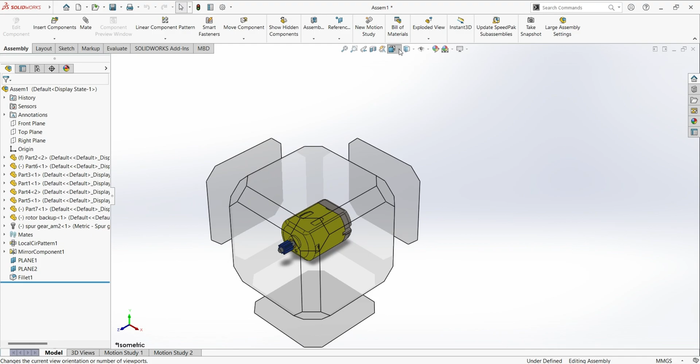So this is my DC motor project, and this is the assembly view. I have it here in its isometric view, so I'm showing you all the views. This is the front view, this is the top or plan view, this will be the right view. The right view is identical to the left view, and then we'll go to the back view, and then this is the bottom view.

So we're going back to isometric view, and when I do this, we can see the hidden lines, the components that make up this DC motor more clearly. So we can see the inner components more clearly, and this will be my assembled DC motor. We'll move on to the parts right now.

Okay guys, so this is my first part. The first part is called the housing. This is the housing of the DC motor.

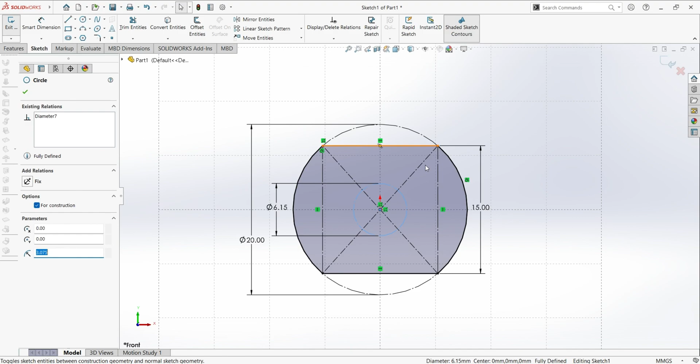So how I made this is, once we edit the sketch, this shows the base of the sketch on how I made this. First I made a circle with 20 millimeters diameter, and then another circle with 6.15 millimeter diameter. This circle and this circle are construction geometry. Once I put this construction geometry, it basically makes the lines as a baseline for sketching your lines on top of it.

After these circles, I chose this center rectangle. I took it from the middle axis and pulled it. The length of this rectangle is 15 millimeters, and I made this construction geometry too.

Why I did this is because after this I chose the line tool. I basically did one point here and one point here to make one straight line, and did the same on the other side. After this I chose the 3-point arc option, from here to here, and fixed this inside this circle's arc, and did the same here, so we get this shape.

After that I simply boss extruded. Once I boss extrude, I get this. Once I edit the feature, you can see this is the plane, and it's 19 millimeters from mid plane. Because I chose this as the mid plane, it will go from both sides, both axes.

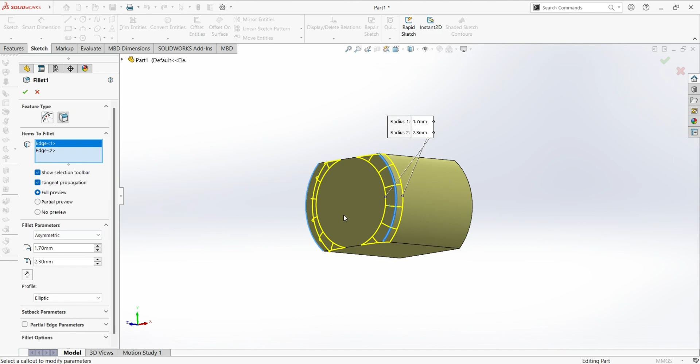Then we'll move on to the next step. I chose the fillet option to make these rounded edges of the housing, and then there's another fillet to the top and also the bottom of this. For fillet one, I've chosen 1.7 millimeters and 2.3 millimeters as my fillet parameters. For fillet 2, it's 1.25 because this is a symmetric fillet.

Then boss extrude. For this boss extrude, I made a circle right in the middle, and then I extrude it for 1.75 millimeters, and then I fillet this edge for 1 millimeter.

Moving on to the next step, I shelled this part over here, because this is a housing, it has to accommodate other inner components. For the shell, I have chosen this face and this face, and the parameters are 0.375, which is the thickness.

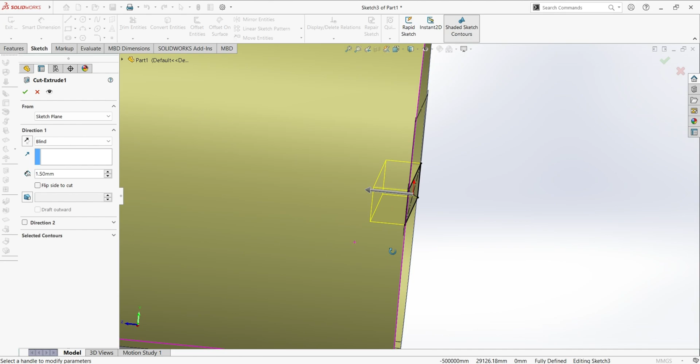After doing that, I moved to cut extrude. This cut extrude is here and also here. So how I did this is I chose the rectangular option from the middle and pulled it up with 1.5 millimeter length. Then I went to surface revolve.

This part and here, and then I move to thicken. So then I went to surface revolve, which you can see here. I did a sketch, and in this sketch I made this curved line, this arc, and then this straight line. This arc has a radius of 0.75 millimeters, and then 1.25 millimeter in length for the straight line.

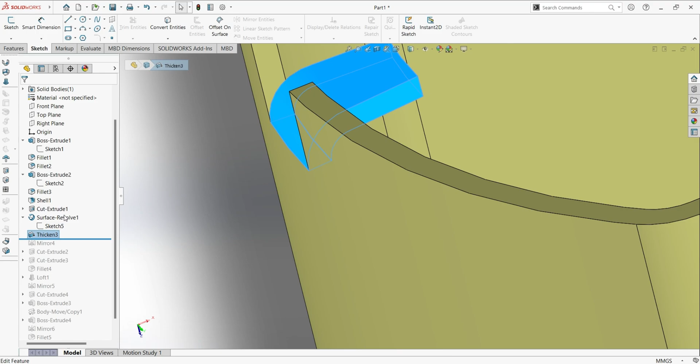So then I surface revolved this. After doing that, I thickened the line. What happens basically is that this line over here, I am making this particular line thicken a few millimeters, which is 0.38. And then I am mirroring it, so this part over here has the same feature.

So I mirror it about the right plane, so this feature can be mirrored to the other side easily.

Next, I'm going for cut extrude, cut extrude over here above this hole. It has a 1.5 millimeter diameter, and I fixed its position up from this hole, from this axis, at 5 millimeters. After doing that, I go to another cut extrude on the sides, these holes over here and here.

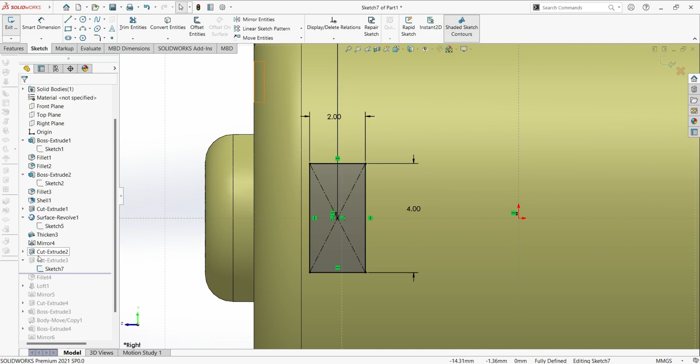So if you can see, this rectangular over here is straight in line with the axis. So this is a center rectangle, 2 by 4 millimeters, and then basically just cut extrude through all.

After doing that, I fillet this part over here. The fillet is 0.5 millimeter.

Moving on, we have the loft. For this loft, I had two sketches. So to have a proper look, we'll go to this. I made this sketch over here with these straight lines, and I made this point and this point as an arc.

After making this arc, I can bend it to my will using these little connectors. There are 2.25 and 2.25 arc radii, and this one has a 4 millimeter distance.

I repeated the same arc with a distance over here, just right in front of it. This distance is 0.38.

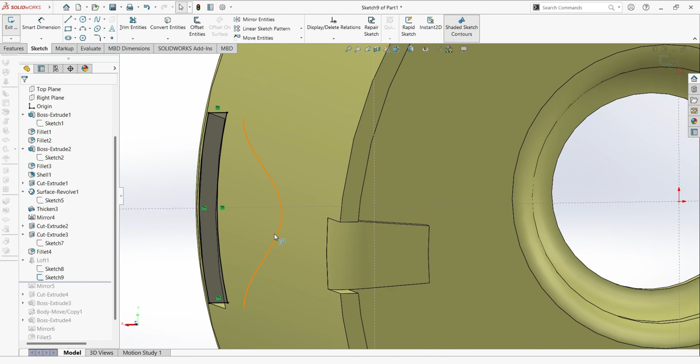So we will go back to normal view, and then there's this other sketch, over here, with these 4 lines. I made these 4 lines for the lofted area.

For this area to loft, I had to convert the entities, and only then can I loft this segment to get that perfect curvature.

So when I loft it, this is how it becomes. The area chosen is sketch 9, and this is sketch 8. So when I loft it, I loft this face to this face, and the metallic parts will bend from here to here, with this part excluded.

So then I mirror this feature to here. It is mirrored on the right plane.

Moving on, we have the cut extrude. This cut extrude is at the bottom of this housing.

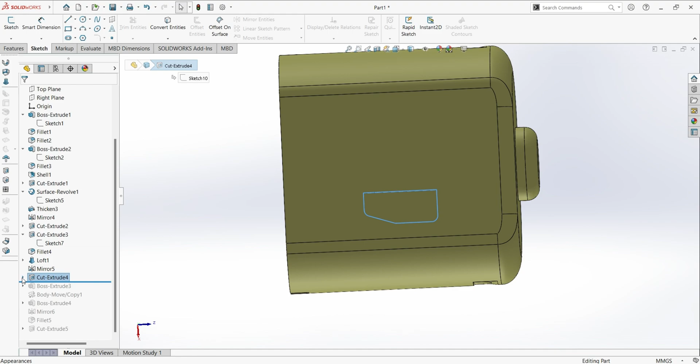We'll have a look at the sketch. So there's a straight line, straight line, straight line, another curve, straight line, a slight curve over here, and then another curve over here. You can see the distances are all made up.

First of all, how I did this: I made a center rectangle, pulled it up, with a distance of 2.66 by 6 millimeters.

After that, I had to make a construction geometry. After making the construction geometry, I built the lines as straight line 1, straight line 2, curve, straight line 3, and then there's a slight curve over here, and before this I had to make another center rectangle.

If you can see this line over here, this part and this part join. So from this corner to this corner, there's a straight line, then a curve, and then another straight line back. After doing that, I cut extrude it up to next.

I chose up to next because it will have to bend a bit inside.

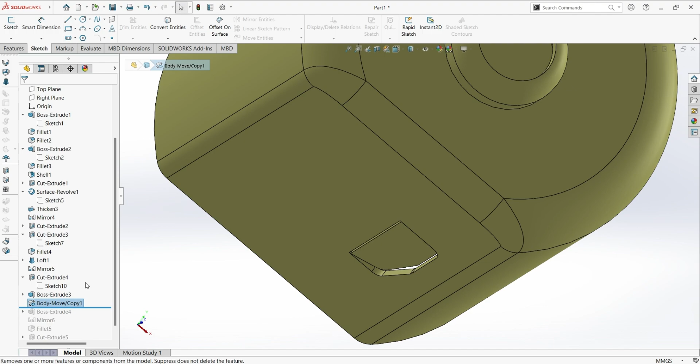So what happens here is this particular edge over here goes inside negative 13 degrees, like this is how it looks inside, negative 13 degrees.

And then boss extrude over here. For this boss extrude, I just have to fill the gap between this plane and the angled part over here, so there will be a gap here. To fill in this gap, I have to boss extrude.

So I go to edit sketch. As you can see, there's this line. We convert the entities and then simply enter boss extrude, so it will fill from here up to here.

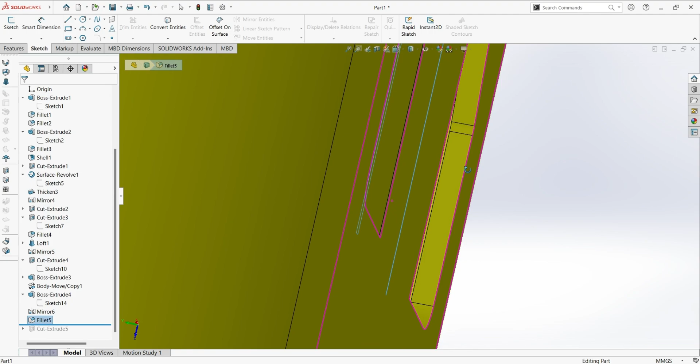After doing that, I mirror this feature over here, again using the right plane, and then I use the fillet feature over here and also over here to smoothen those two parts. And then as final feature, we cut extrude over here, for this purpose is for the cover of the DC motor to join this housing later.

So for this cut extrude, we go to the sketch. It's another center rectangle with 1 by 2.5 millimeters. So this is a simple feature, and then that's it. This is the first part of our DC motor, and it's called the housing.

Okay, so this is our second part. This is the cover for our DC motor. This is how it looks. So we start this by going up over here and we look at the sketch.

Okay, so here we start off by making this circle, and then we choose it as our construction geometry, and then we make this rectangle just how we did in the first part. We choose everything as our construction geometry first, with 15 millimeters in length and 20 millimeters in diameter for the circle.

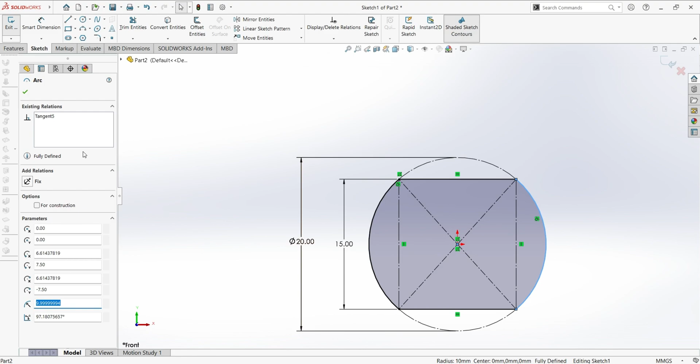So after doing that, we build our lines on top of the construction geometry. There's straight line 1, straight line 2, and then closed by this arc over here and also over here. So you guys can see. Next, moving on,

we boss extrude our sketch 5 millimeters. Alright, after that, we make a circle just at the center with 8 millimeters in diameter, and then we will boss extrude this circle just for 2 millimeters in distance, and then we will go for fillet 1.

Fillet 1 is exactly like how we did for part 1. Okay, so we look at the feature again. There's 1.7 by 2.3, and this is asymmetric. It means they are not the same on both sides. Okay, and then after that we go to fillet 2, top and the bottom.

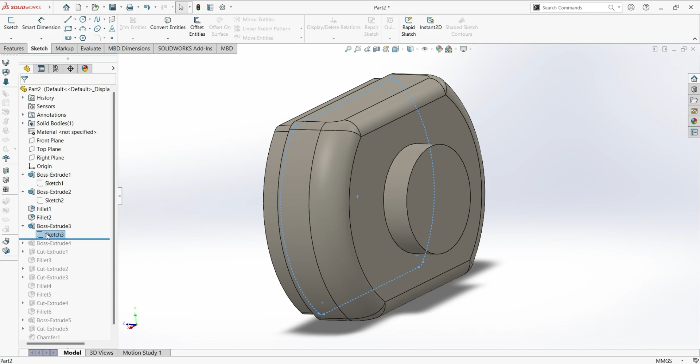So these are the dimensions, 1.25 millimeters, and then there's boss extrude. So for this boss extrude, we are making another sketch. Okay, this sketch over here, you can see there's a point over here, so that's basically an arc.

Over here too, there's an arc over here, over here, and over here, and over here. So with only two straight lines here and here, we make this arc, 0.87, 0.87, and goes the same for both up here, and then 9.67. Basically it has a distance, these arcs.

The parameters are 0.25, and after doing that, we boss extrude the feature. So this feature then comes in front 1.5 millimeter in distance. Okay, so we will be doing the same thing with the parameters of 0.25 this time, and then we boss extrude the feature 1.5 millimeter.

Okay, so then we cut extrude. For cut extrude, we have to look at the sketch. So this is a sketch. So look at the sketch. What I did is basically this straight line over here, and then there are two arcs.

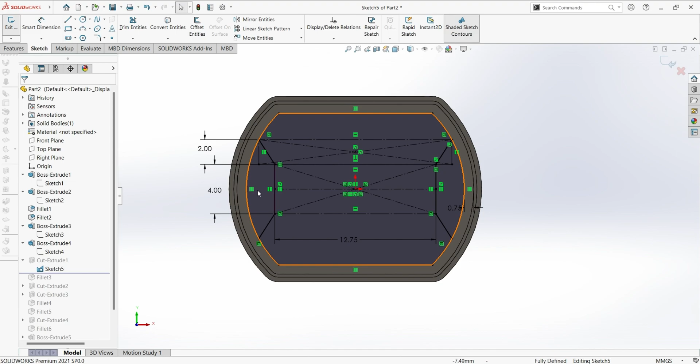So after doing this, we convert the entities, and then we'll make two straight lines over here, and then connecting this arc and this point over here with straight lines, and we'll repeat the same thing at the bottom, and that's how we get our sketch. After getting the sketch, we will cut extrude for 6.5 millimeter in distance. It will go up to this area.

After doing the cut extrude, we are going to fillet. This is just an additional feature. We choose all these edges, there are 12 edges over here, 6 here and 6 here. There are symmetry edges with 1 millimeter degree, and then after doing that, we go to the cut extrude at

the sides of the covers. So for this cut extrude, we're going to look at the sketches. Basically, there's a center rectangle over here made with the construction geometry, and after doing this, the dimensions are 2 by 3 millimeters, and then joining this construction geometry is these straight lines with this arc over here with 1.5 degree radius.

And then what happens is I cut extrude both parts, and then I cut extrude the middle. So the middle, its point is its axis with 2.10 millimeters in diameter.

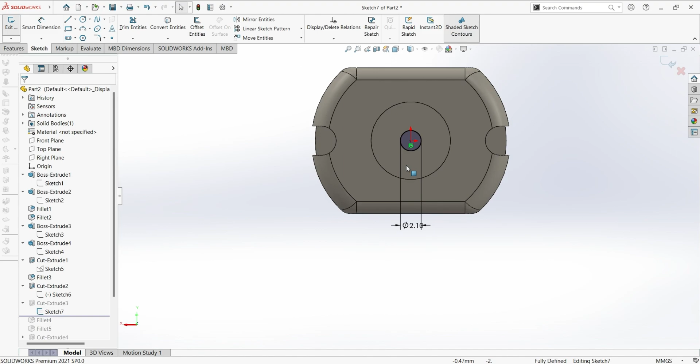After that, we're going to fillet the boss extruded part over here for 0.25 millimeters, and then we're going to fillet the parts we cut extruded at the sides for 0.10 millimeters.

After doing that, we're going to cut extrude here beside the circle. We'll look at the sketch - this is a center rectangle, dimensions 2.8 and 0.4 millimeters, so they are symmetry. Then we will exit the sketch, cut extrude, and it's cut through all, so it doesn't have a dimension.

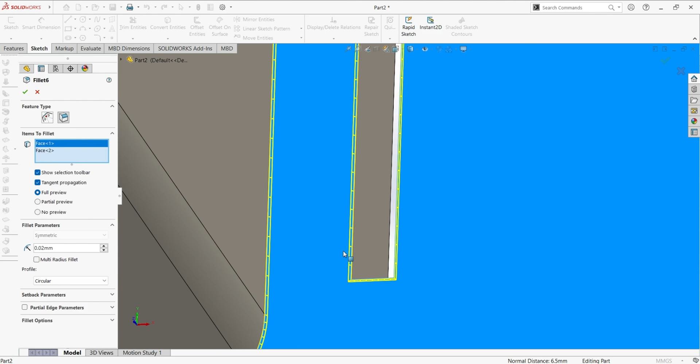And then we will fillet the back of the cover. Just to look at this, yeah, so it's in front, here and also here.

Okay, and then go to the boss extrude. Looking at this sketch over here I made, there is two straight lines and then one arc, and this arc I've made with the straight slot, this option over here.

After doing the straight slot, we boss extrude this feature for 4 millimeters. So this is how it will look.

And then we go to the cut extrude of this part. Look at the sketch - there is a circle above this circle, a bigger one with 6 millimeters. Then we edit the feature. We look that this circle cuts up to here, but it's not cutting the whole part, yeah, it has a distance of 2.5 millimeters.

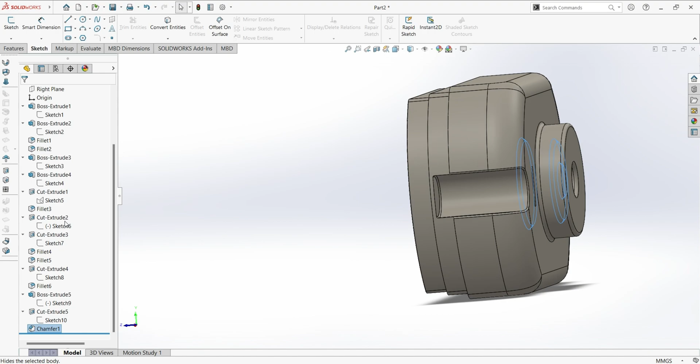And then we chamfer these areas, this part over here, for 45 degrees and 0.25 distance. So this is our second part, the cover of the DC motor.

Okay, so this will be the third part of the DC motor. So we choose the front plane first, so normal to - this is how we will make our sketch.

Okay, so if you look at this sketch over here, first of all there is a straight line, and then the straight line is made a construction geometry. So basically how I did this was using the straight slot feature. After doing that, I have to change it to construction geometry.

Once I've done that, I'll do a straight line and then an arc with 0.7, 3 point - you can see the dimensions at the side - and then there's another straight line, and then there's another bigger arc over here. This bigger arc has a radius of 1 millimeter, and then there's a straight line ending this part, which is 5.5 millimeter. After that, we have the base bend.

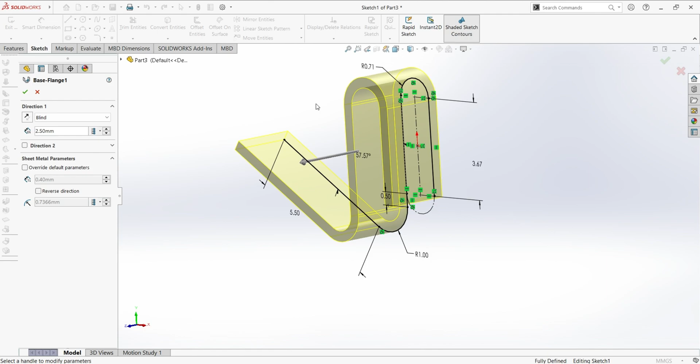We look at the base flange feature. The base flange feature, basically it's like a thicken or boss extrude feature for these curves and everything. So it is brought up for 2.5 millimeter in distance, and after doing that, there's a base bend and also base bend 2. So these are the parts of the base flange.

Okay, after that there is boss extrude here. Why we boss extrude here is we look at this sketch. The first straight line, we make a rectangular over here and then change it to construction geometry, or convert entities, sorry - we convert the entities, and then what we do is we boss extrude it for 4.5 millimeter in thickness.

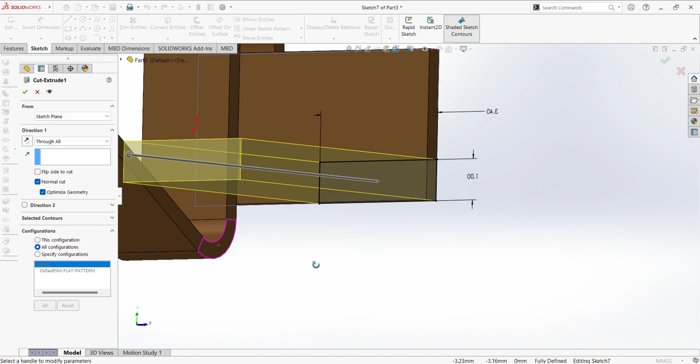After doing that, we go to the cut extrude. We cut extrude a small portion of the extra boss extrude, so there is a corner rectangle over here. We convert these entities, and then you can see that the dimension of this particular rectangle is 1 millimeter. After sketching that, we will cut extrude through all. So have a look.

After doing that, we will go to the fillet. At this fillet, we are curving this part, this edge over here, giving it a curvature. How I did this is I chose 3 parts: part 1, part 2, and also part 3 - these 3 sides, these 3 faces, to make this fillet.

Okay guys, so this is our last part. This part is called the rotor, and unlike the previous parts we've done before, this is a single part. It is not assembled. As you guys can see, there are multiple parts, it looks like it has multiple parts. Yes, it does, but then it is all made within one single part. Okay guys, so looking at how we did this, we'll move up.

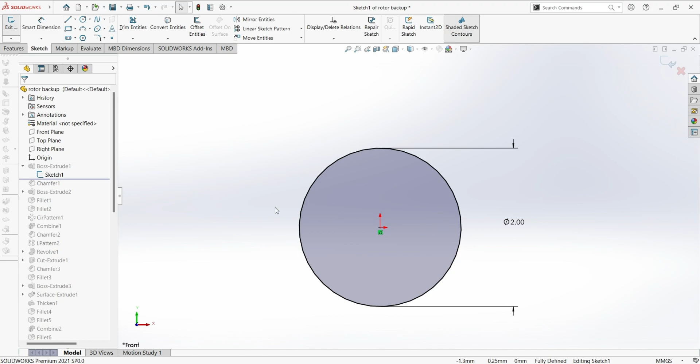Okay, so at the front plane, we're going to do our first sketch, which is again a simple circle with 2 millimeters in diameter. After this, we're going to exit sketch and then boss extrude this with the mid-plane feature, and the distance will be 38 millimeters.

After this, we will move to our chamfer. We're going to chamfer this area over here, and then another edge over here, both edges for 45 degrees, and the distance will be 0.2 millimeters. After doing that, you can have a look here, these are the chamfered edges.

So we're going to another sketch. Okay guys, so when we edit the sketch, we can have a look at the sketch of this part here. This part is called the core disc.

So what happens is that I'm going to make a circle just above this shaft, and then after this shaft there's another circle. So one circle and then another circle over here. After that, we're going to make this circle as a construction geometry, same with this one over here. After changing this to construction geometry, we're going to smart dimension it for a 2 millimeter distance.

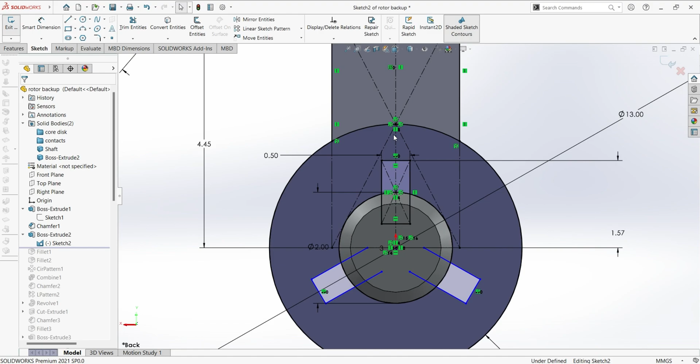After doing that, I'm going back here over the shaft and making a center rectangle. And then after making this rectangle over here, I'm going to make another rectangle starting from this point to here, and you can have a look at the dimensions, 4.45 by 2.25.

And then this one will have 0.5 millimeter, and then from this edge to the axis we'll have 1.57 millimeters over here.

So what happens next is that we're going to make this distance from the axis to this one, 4.45, as I've said before, and then we're going to insert a line.

So what line we're going to insert is this particular arc over here, this one, this arc. So we're going to go for this option, the 3-point arc. The first point will be here, second point will be here, and the third point will be the middle.

Okay guys, so after choosing the arc, we're going to make a line, a simple line here, and then we're going to move for another line over here.

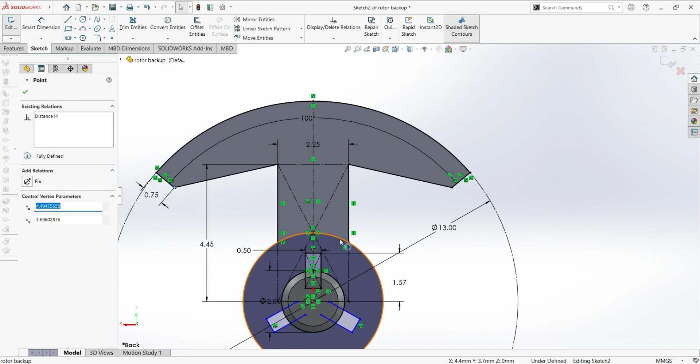After making these lines, what we're going to do is join these lines, this one over here and here. We're going to make a point with distance, and then after doing that, we're going to apply smart dimension for the lines, 0.75, and it should be the same with this line.

After that, we're going to apply smart dimension for the arc, which is 100 degrees. After applying 100 degrees, we're going to move on to this line over here.

So what we're going to do is apply a straight line from this point to this point, you can see, and then there's this point to this point. After applying this straight line, we're going to make another straight line from this point to this point. Same goes for this point and this point, making this whole core disc.

So after that, we can have a sketch like this. Okay, have a look.

What happens next is we're going to boss extrude our core disc, and we're going to boss extrude for 3.8 millimeters with offset, not sketch plane. We're going to choose the offset option, and then 3.8 millimeters, and this distance will be 0.5 millimeter depth.

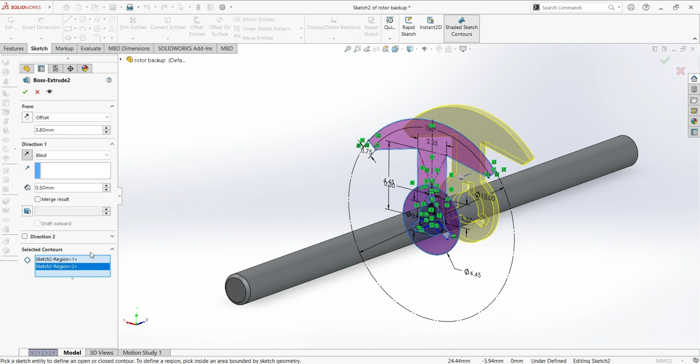Okay, so the selected contours are these: sketch region 1 and sketch region 2, this one up here and the circular one. After doing that, we're going to move on to the fillet. So we're going to apply the fillet feature over here, this edge, and also this edge over here.

Okay guys, so the edges chosen are already here: there are 1, 2, 3, 4, 5 and 6. Just like before guys, it's 1, 2, 3, and then there's 1 and 2. So both edges are chosen, and once we've done that, the fillet is going to apply.

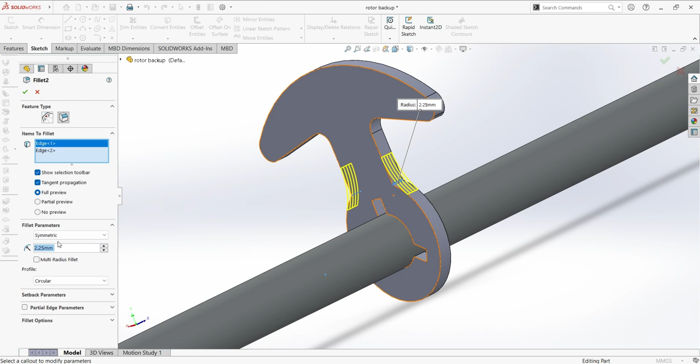Okay guys, so moving to the second fillet, which will be for this part over here. Look at the difference: this is a straight point and there's a corner over here. To avoid that, I'm going to apply a second fillet. For this fillet, we're going to apply 2.25 millimeter in radius, and after doing that, we're going to choose the circular pattern. So if you go here, linear sketch patterns, you can have a look at this circular pattern feature.

So what it's going to do is we're going to make this one core disk and multiply it by 3. So this part is going here, number 3, so it's going to be a multiple of 3 core disks after this, which is this as a reference. Once we've done that, you can have a look. There's the combine feature - we're going to combine all 3 separate parts to become one. So you can have a look over there.

Okay, so circular pattern 1, circular pattern 1, and then fillet 2. Okay guys.

So once it is added, we can move to our chamfer. We're basically going to chamfer both faces, face 1 and face 2, with 0.5 millimeter distance and then 45-degree angles.

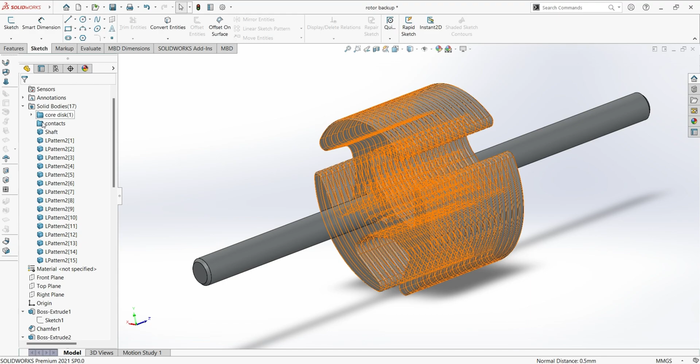So after doing that, going for the linear patterns, which is all of these whole core disks. Okay guys, so for these core disks, this one, so we look at the feature, going to choose edge, and then the direction, we can change the direction to here, and then the spacing will be 0.5 millimeter with a multiple of 16 core disks. Okay.

So once we've done that, we have our core disks, and then we're going to make this part over here. Okay guys, so how we're going to do it, let's look at the sketch.

So this is basically the top plane. We're going to sketch at the top plane, and then once we look at this one over here, what I do basically is once your cursor is close enough to this line, the edge of the shaft, click it and then change it to construction geometry.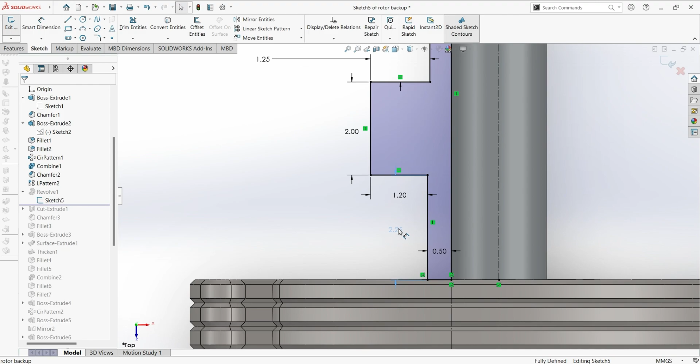Once you've done that, you can choose to draw on it. You're going to make lines from this point to here and here, following straight lines, and then apply smart dimension: here is 0.5 millimeters, this will be 1.2 millimeters, this distance will be 2.25 millimeters, this edge will be 2 millimeters, here will be 1.25, whereas here is 1.2 millimeters. Finally, once we've had that edge, this sketch is completed.

After that, we're going to exit the sketch and look at the revolve. So for this part over here, we're going to choose the revolve feature. You can look here, the revolved base and revolved boss or base feature. So we're going to choose this line 1.

So line 1 is a simple line. You have to choose the line feature and then use the center line from this point nearly to the axis, to the end of the shaft, and choose it to be the center line. After that, you can choose this line to be the axis of revolution, and the direction will be 360 degrees, because we don't want any openings or incomplete revolutions of this part.

So what this part is going to be is that this is where our connectors and holders of the coils will be. Okay, so after doing that, yep, we will have this part.

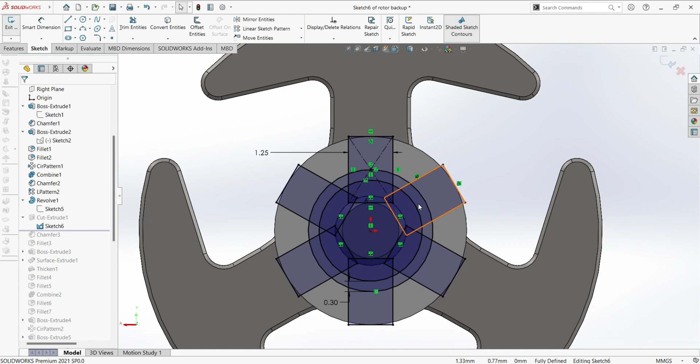So it's going to move away from here to here, there's a 0.30 distance, and after doing that we are going to make a rectangular over here. This rectangular, we are going to choose it as our construction geometry. After choosing it as our construction geometry, we're going to set our smart dimension as 1.25. As you can see, after doing that, you're basically wanting to choose this line over here, and then hold control with this line over here, and set this edge and the lines as tangent.

So once you've chosen the tangent properties, this is how your rectangular is going to look like. Okay, once you've done that, you're going to... yeah, so once you've done that, you're going to choose a circular pattern.

So yeah, this one over here. Once you've chosen the circular pattern, you're going to choose this face and then set it for 6 numbers. So 6 rectangulars are going to appear around the body. After doing that, you're going to have this sketch over here.

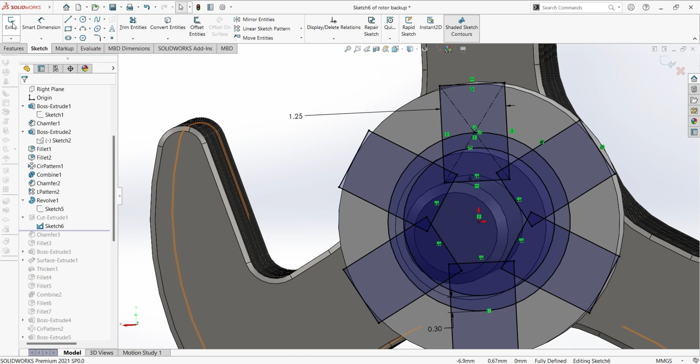Once you've done that, you can exit the sketch, and then we can cut extrude. During this cut extrude, we're only going to select parts of this rectangular, not the whole rectangular. The parts selected are the offset line. We set this line to offset 0.30 earlier, so we're going to choose the space between both of these lines, this whole ring, and then the remaining of the rectangles.

So the remaining of the 6 rectangles and this one ring, and you can look at the selected contours here. It will highlight each and every part that's selected. After selecting all this, we can choose to cut extrude with a 1.25 millimeter distance. You can see it's going up to this area.

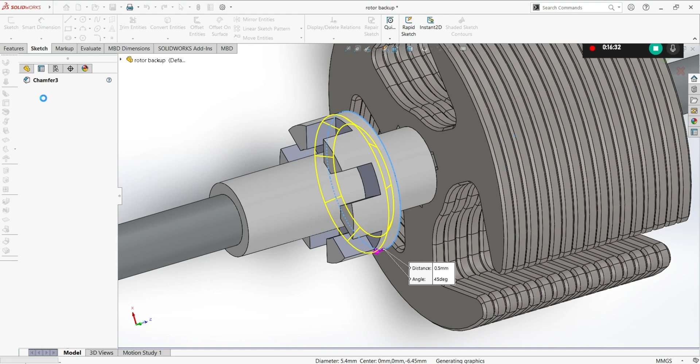Once we have done that, we will have this shape. Once we get this, we're going to move and chamfer this area, this edge. Once you've chosen this edge, as usual, I'm going to set its distance to 0.5 millimeters, and then we're going to click the chamfer. So this edge is now chamfered.

After doing that, we will go to the fillet. Once you've chosen the fillet part, we're only going to fillet the edges of these parts that we have cut. Once you've chosen this face, it's going to select all of those edges for a 0.07 millimeter radius. Once you've done that, we're going to move to boss extrude.

For this boss extrude, we're going to make our first contact. We will look at the sketch. So we're going to again make a line, a line from this circle to this circle, it's a simple one, and another line from this circle to here. You can see this one is connecting to the axis, and this is line 2, and we will insert these lines here.

After doing that, we're going to make these lines coincident with this line, and then we're going to choose the coincident. As you can see, there's coincident number 1, then number 5, and then number 8. After doing that, we're going to smart dimension our arc here, which is 110 degrees.

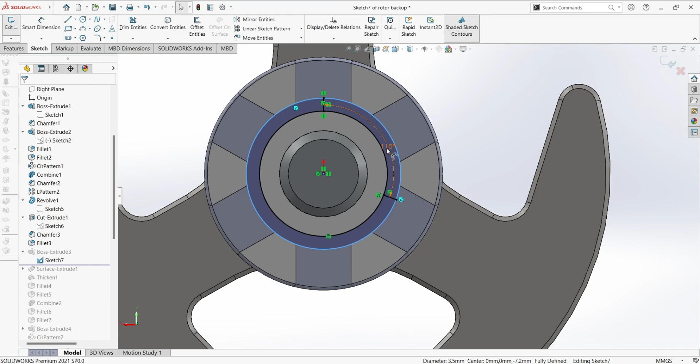After setting these 110 degrees, we have our sketch of our contact here. This is the base of the sketch. So what we're going to do next is exit the sketch, and then boss extrude that sketch.

For a 4.75 millimeter depth, it's going to come up to this area with the sketch plane, and then we're going to move to expand the contact.

We're going to make another sketch on top of the contact. What we're going to do now is make this straight line here, and then one big arc. Then we're going to make another straight line following this shape, another arc, another straight line, and then another arc.

But this one we are not going to close entirely, we're going to connect it here. After connecting it here, we're going to choose only this line to become our construction geometry. After doing that, we have this as our base for the shape of this line, which is made with our straight slot. Once we've chosen this straight slot, you can see the parameters as such.

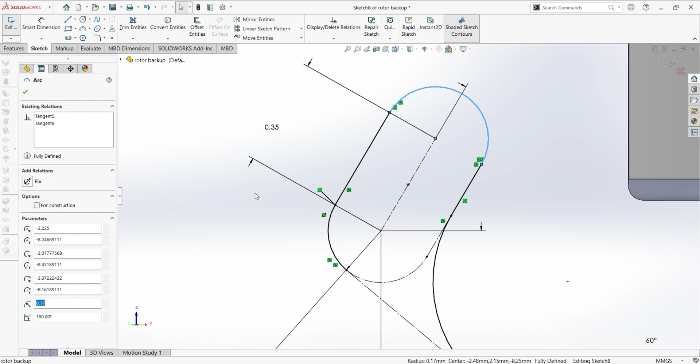After following these lines, we're going to smart dimension it: 0.35 for this line, this arc will be 0.17, this arc will also have 0.17, and this arc will have a 0.4 radius. It has a few relations.

There's tangent 1, tangent to this line, then tangent 2, making this curve tangent to this line, and then tangent 13, which makes the line we just made as construction geometry tangent to this arc here, and then coincident for both here and here. After doing that, we have our sketch fully dimensioned. After dimensioning them, we're going to surface extrude just as we did earlier.

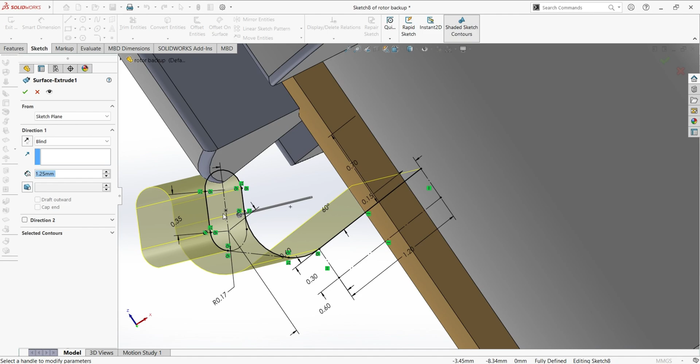For the surface extrude, it's going to look like this for 1.25 millimeters in distance. We're going to use the surface extrude feature to extrude our sketch. We edit the feature and use the blind option, with the distance set to 1.25 millimeters. So this is how it's going to look, and this is the part of our contact. This is the contact, and this will be our coil holder, which holds the coil later on.

Once we've done that, we're going to thicken this surface extrude. After adding the feature, we're thickening it by 0.2 millimeters. From this it's going to go up here - you can go up, down, or in the middle. We're going to choose to go up, and then thicken it. Once we've thickened it, we now have our coil holder.

After finishing our coil holder, we're going to fillet a few parts - these two edges. You can see E1 and E2 for a 0.15 millimeter radius. They are symmetric. And then there's another fillet.

We're going to fillet these two lower parts of the contacts, for 0.25 millimeters. After doing that, we're going to combine both the coil holder and the contact.

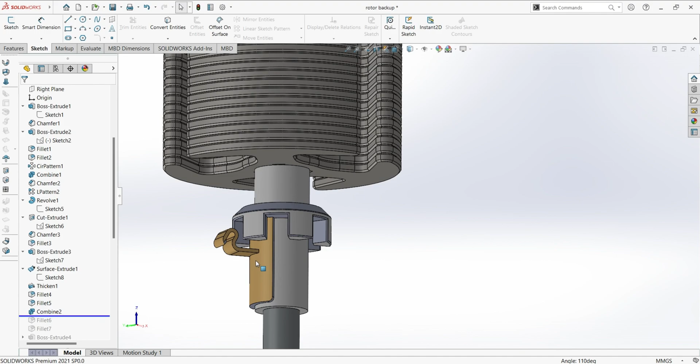As one single part, what we're going to do is use the combine feature, simply combining fillet 1 and fillet 2. Here it's stated as fillet 4 and fillet 5, but I call it fillet 1 and fillet 2 because there are only two parts here - fillet 4 and fillet 5. We're going to choose both of these parts and combine them into one part. After that, it becomes one single part.

Next there's fillet 6. We're going to edit the feature and have a look - we're going to apply the same fillet we applied down below, to the part above. You can see it here, edge 1 and edge 2, for a 0.25 millimeter radius. This is how it's going to look.

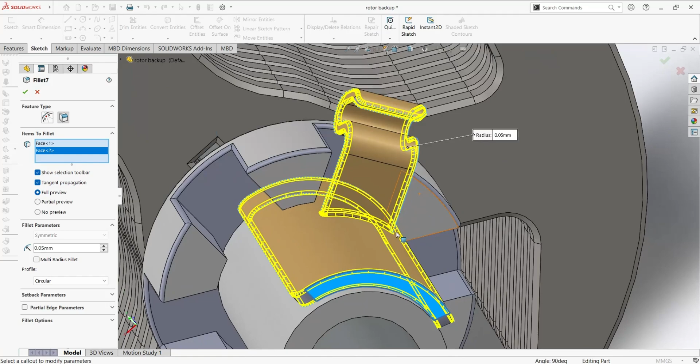After doing that, we're going for fillet 7. Fillet 7 is basically applying fillet to the whole body - all the edges are covered. There's face 1, and then face 2. This edge, this side of the part, is face 2, and face 1 will be this side of the part, for 0.05 millimeters. And then we're going to do it again here.

After the fillet, we're going to do boss extrude 4, and the sketch has two coils. We're going to edit the sketch - basically we're going to make two circles, 1 and 2, and apply equal radius. We choose this circle, control-hold, and choose the other circle, arc 1 and arc 2, so they have equal radius.

After the equal radius, we do this - they stick together like this - and then we simply boss extrude them on face 1, choosing both of them up to a surface. This is the surface we have chosen, and they will only boss extrude until this far, no further. This will be the coil joints - after we've done our coil, this is where our coils will join.

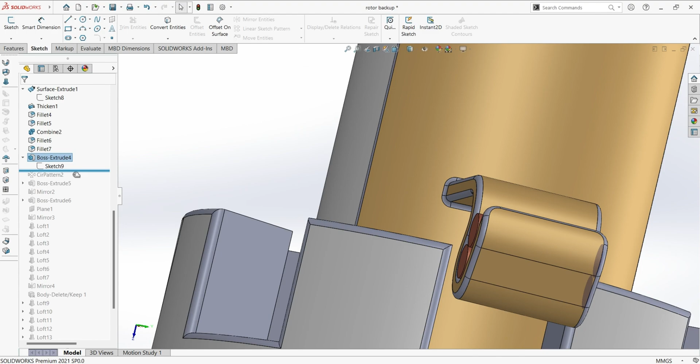Moving on, there's the circular pattern 2. What we're going to do is select this part - our contact and our coil holder. There's contact 1 and then boss extrude - we're going to choose this, only one part of the coil here, the coil joint. So we're going to boss extrude.

We're going to choose the boss extrude and also contact 1, and then make 3 multiples of it. We've selected 3 with 360-degree angles, and once we've done it, we will have 3 identical contacts.

Once we have that, going on to boss extrude 5, which is now we're moving on to our coils. So how to make these coils is that we need 1, 2, 3, 4, 5, 6 and 7 circles arranged in this manner.

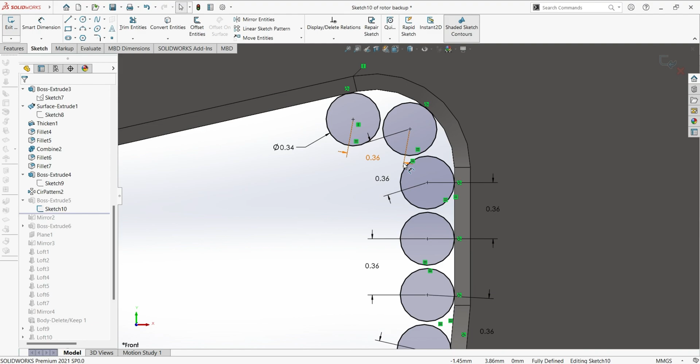Once they are arranged, what we're going to do is smart dimension each one for 0.34. Once we have the smart dimension on one circle, we can choose to make the other circles equal, so all the circles have equal dimensions, equal diameters and radius.

After doing that, we're going to have a spacing dimension between the center points of each circle, each pair, of 0.36 millimeters. We're going to apply this to all the other circles. As you can see, there's 0.36 between every single point of the circles.

Once we have that, we're going to boss extrude those circles, vertex 1 up to vertex. The vertex 1 will be here, this point over here. Once we've chosen that, the circles here are now going to make this side of the whole coil.

So there's vertex 1 and then there's vertex 2, so we're going to do the same thing with both sides. After applying that, now we have this side of our coils.

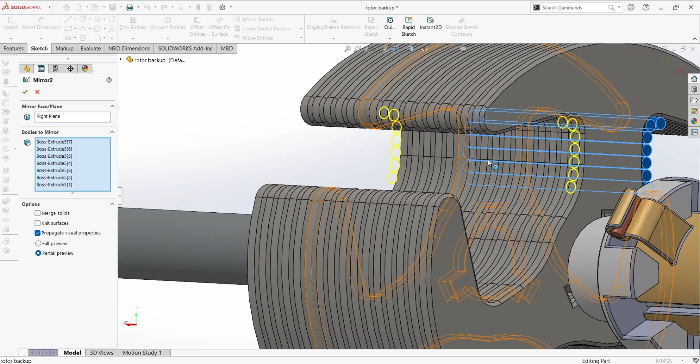Once we have that, we're going to simply mirror. We're going to use our right plane, and then our coil is going to be copied at this side of the core disc. So we've chosen all 1, 2, 3, 4, 5, 6, 7 coils.

We're going to mirror them. Once you have mirrored them, we'll have this. Once we have this, now we're moving on to another boss extrude, which is this side of the coil.

So if you look at the sketch, what we're going to do is start off with one circle, making this one circle close to the edge of this face, and then we're going to use this dimension between this center point and also this point over here.

We're going to set it as 0 distance. Once we've done that, we're going to do the same thing we've done before. We're going to smart dimension this circle for 0.34 millimeters, and then repeat the whole process.

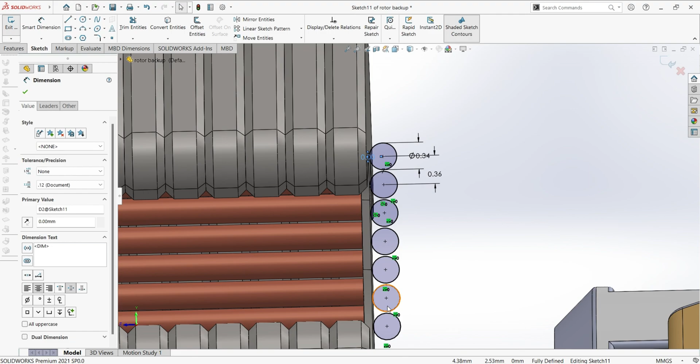1, 2, 3, 4, 5, 6, 7 circles with 0.36 millimeters spacing between each center point of the circles. Once you've done that, it's going to be aligned like this, close to the surface of this core disc. After that, what we are going to do is boss extrude.

We're going to boss extrude from one point here to another point here. It doesn't matter, you can take this point or that point. It's going to be the same as long as it only extrudes within this constraint. You can see this line, you cannot go further.

Once you've done that, we have this side of our coils, and what we're going to do now is create a plane. As you can see, there's plane 1, and this plane is the middle, the center of our core disc. So after creating this plane 1, we're going to mirror.

What we're going to mirror is these 7 coils at this face. We're going to put it back here. We're going to choose all 7 of them, and once you've copied, there we have 1, 2, 3, 4, 5, 6, 7 coils again.

After that, we're going to use this feature called lofted boss or base. What this feature basically does is we choose one edge and another edge, or you can choose an edge or a face, it doesn't matter. For me here, I've chosen face 1 and face 2, and we're going to use normal to profile constraint at both start and end constraints.

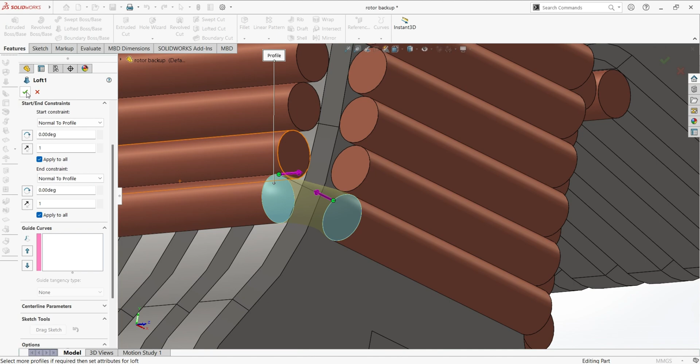Then we're going to uncheck merge result and merge tangent faces, and then simply tick, and after that it's going to connect both of these coils, making it look realistic.

So what we're going to do is repeat the same step for each connection. There's loft 2, loft 3, loft 4, loft 5, loft 6 over here, and then the final loft here will be loft 7. For loft 7 it's a bit special because it cannot overlap.

So what we have to do is make sure it doesn't overlap. Once we've adjusted its direction, now we have one complete connection between both coils. So what we're going to do now, if you've already guessed it, yes, we're going to mirror it to the other side.

So now this part of the coils is also joined, after which we're going to use our right plane to mirror this. We choose all 7 lofts and then mirror it at our right plane.

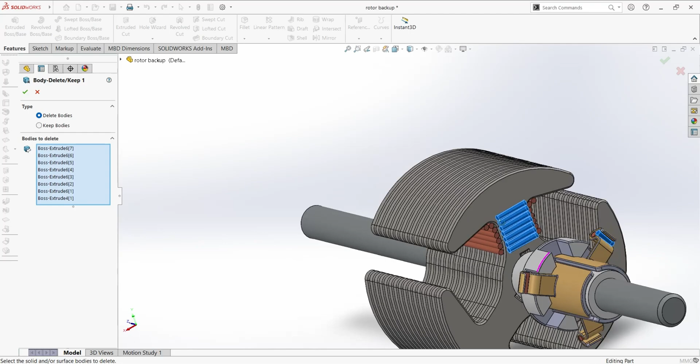After doing that, we can now move to the next part: body delete and keep 1. So what we're doing here is we're going to delete these parts. Why are we doing it? Because we want to cross section our coils here now.

So how we cross section is, we're going to edit the feature, choose the same lofted boss or base, and choose the edge here, as I've chosen. So we're going to start with the second circle here from down and the first circle here from down. Once you've done that, you're going to go like this, edge 1, and then check here.

Previously there were coils here, right, the straight ones. But then we've used the body delete function, and after deleting them, what remains here are the sketches. You can see the sketches. So we're going to check the sketches, the closed loop over here, and then our edge. After that, we're going to do the normal routine: normal to profile, and as usual, don't forget to merge result and uncheck merge tangent faces.

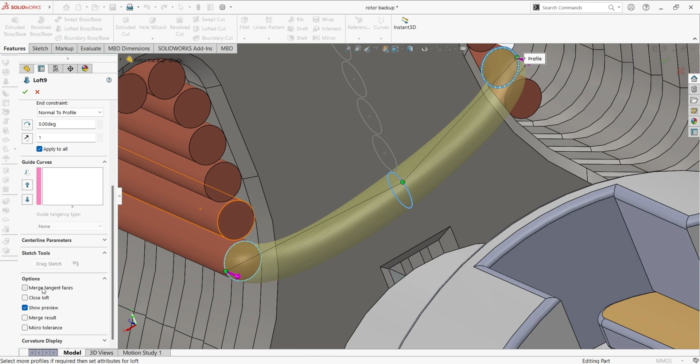After doing that, now you have your conjoined coil. So we're going to repeat the same feature a few more times.

Here you can see, but for loft 15 it's a bit special again because it cannot overlap. So what we're going to do is at this edge we're going to adjust the direction and then put the end constraint as 1.7, so it will be lifted a bit higher like this to make it more realistic.

So yep, normal to profile — if it's only 1 then it's going to overlap. So if it's 1.5, like this, it's going up a bit, isn't it? But it's not fully open. As you can see here, it's still overlapping this area. So we're choosing 1.7 to be safe, and now it's free.

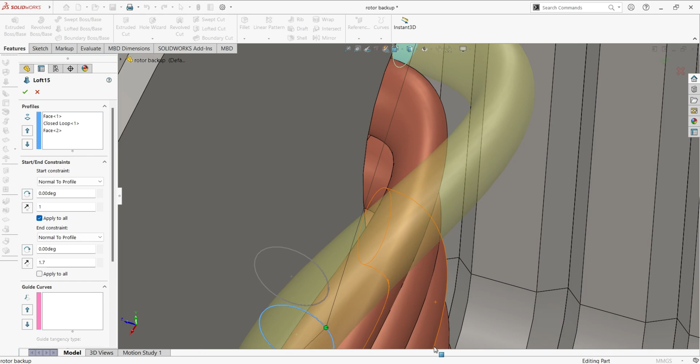After doing that, we have this part here conjoined, and now moving on to loft 16, which is where we're going to connect our normal coil to our coil connectors.

So going to edit feature, basically it's the same thing, but this time we're going to choose two edges and normal to profile, choosing this one up here at the start constraint as number 2. The function here is to make the coils look more realistic, as coils bend in real life, and we don't want to give it more corners than needed. Once we've done that, we have this coil connected over here, looking like this.

And then after that we're going for the next conjoined coil, which is loft 17. As we look into the feature, the previous circle at the bottom one here, we're going to check that, and then another coil connector over here.

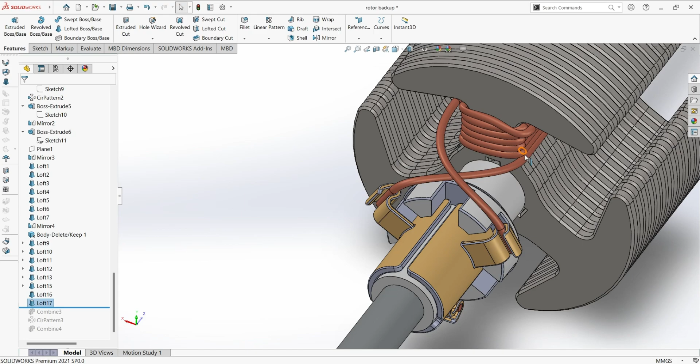So once you've chosen both of those edges, we're going to apply normal to profile constraints and check them. So this is how it will look — this is one perfect coilover.

Okay guys, so after that we're going to combine them. If you ask what we're going to combine — without this command, these coils previously are solitary, each in its own isolation. So if you choose this coil, it's going to be one singular coil.

Okay, so once we choose the combine feature, what we're going to do is simply combine the whole coil so it's going to be one whole coil. We're going to check every single coil sketch, boss extrude we have made, and also the lofts, not forgetting the edges and corners — everything, and we're going to check them all.

So here's the preview. Once we've done that, we're going to add, and here it is now one whole coil. This whole coil is now connected without any isolations. So next, we're going for the circular pattern.

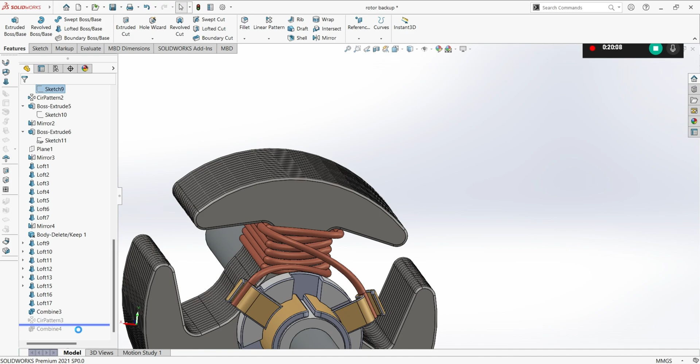Okay, what we're going to do is choose this and combine, and then multiply it by 3 for the other core discs. After doing this, we now have our whole rotor, as you can see.

Once you've done that, even the coil joints are now connected and there are no leftover coils. So the final feature we'll be doing is combining all of the coils again with a circular pattern. We're going to combine 3, our primary coil, and then the boss extrudes will be the small portions of our coils left before. So we're going to combine all that, and now all the coils are one single coil, and we have our rotor completed.

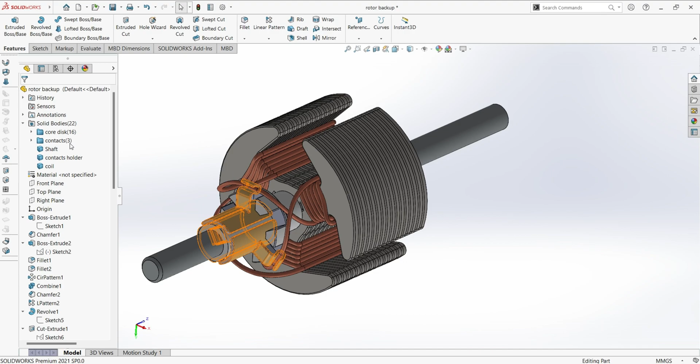Okay guys, so this is all for our rotor part, and there are 22 solid bodies right now with 3 contacts, as you can see, with 16 core discs, these ones. Okay, and then we got our shaft, and then we got our contacts holder, which is this part, and then we have our coil. So there are 5 different components, some multiplied by 16 and also 3. So now we have 22 solid bodies in total. So this is for the rotor part.

Okay guys, now we're back at the assembly part. So now what I'm going to do is show you how to create this whole DC motor assembly, how to assemble all the parts into making one complete DC motor. So what we're going to do is have an axis first.

So we put this here, okay, and then next we're going to bring our parts. As you can see, I have my file manager right beside me. So what we're going to do now is bring our cover first, our part 2, and we're going to fix it here. We're going to point our cursor to our axis, and fix it there. Now you can see there's an F, meaning this part, the second part, the cover, is now fixed with this axis.

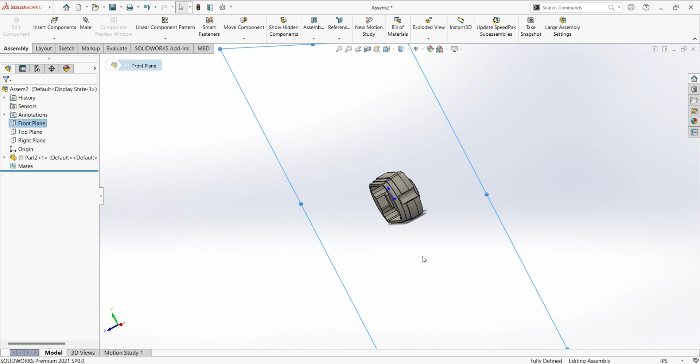And next what we're going to do, you can have a look. Okay, so we add the front plane, normal to. So this is our front plane right now. And now that we have fixed with our axis, we don't need this anymore. So yeah, it's free to observe if you want to make any changes, but I'm not going to make any changes right now.

So what we're going to do next is import our second component, which is this, our part number 6, our bushing. So what we're going to do is bring this bush close to where it's going to go. So it's going to go like this. Okay, so this is where it will be going. Now what we're going to do is bring this out.

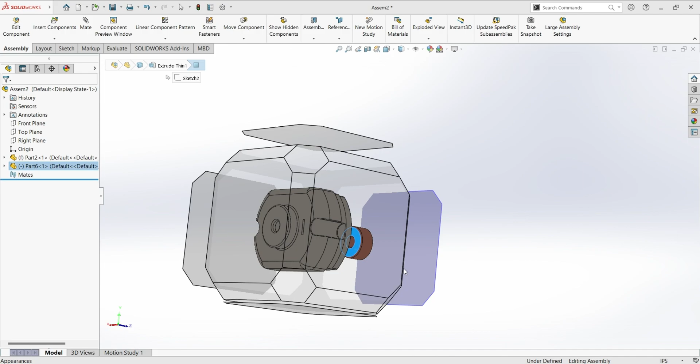What we're going to do is select this face, and then we're going to mate this. Choose mate, and then we're going to mate it here. Okay, so once we've selected this face, it's going to sit right there. Okay guys, so yep, it's now in coincident mate. The bushing is now mated with the cover using coincident mate.

Next, what we're going to do is bring in our next part, which is this. You can rotate it this way, and then once you've done that, just take this, and now we can put it here. So what we're going to do now is make this component over here.

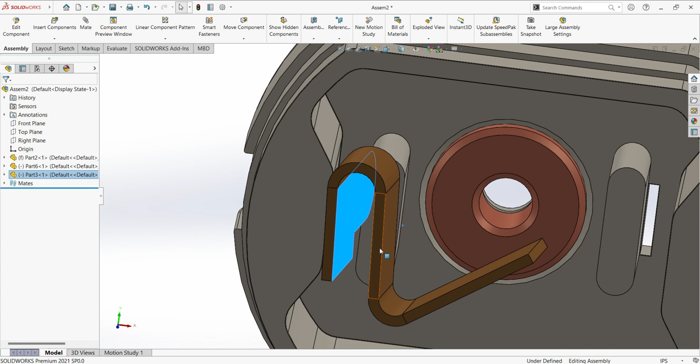So we're going to check this part, and we're going to mate it with the edge that's going to go and sit here. Once we've mated it, it's going to show coincident. Okay, and then you're going to select it, but you can see that it's not rightly at its position where it's supposed to be.

What we're going to do next is go to advanced mates. Advanced, select this and this faces as our width selections, and where the widths are going to go will be our tab selections, this and also this. So now you can notice it's now in its place.

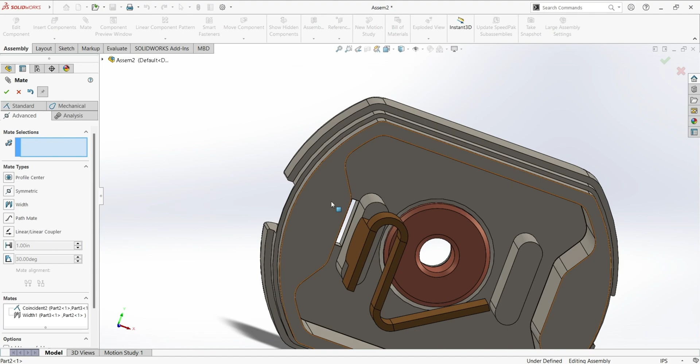Once we move this component over here, it will only go in and out of its designated hole. I'm going to tick that, and then we can move this. As you can see, it cannot go up and down, it can only go to its place.

So next what we're going to do is this: we're going for assembly, and then circular component patterns. Taking circular component patterns, for the direction we're going to choose the place where the shaft is going to go. This will be referenced as our midpoint, and then we're going to go for equal spacing. What we're basically going to do is select components to pattern, click it, and then tick this.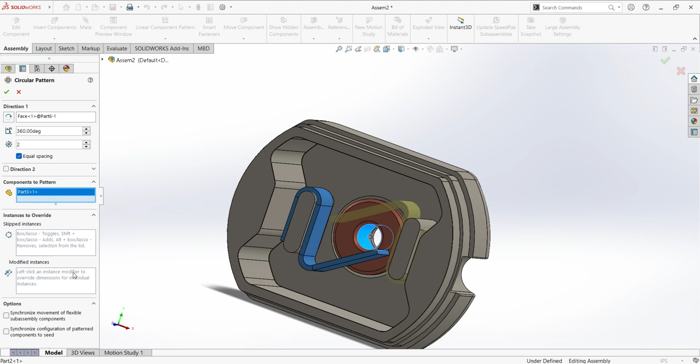So what we have now is an identical copy of this component over here. See, we don't have to import another component, because with this circular pattern feature we already have this part, and we're going to tick it. So now we have two identical parts moving along together.

Okay, so now what we're going to do is see how far this is moving, and then we're going to go for isometric view to have a proper look.

What we're going to do next is bring in our next part, which is our housing. Okay, so this is our housing. What we're going to do now is zoom in, and we're going to mate this part with our housing, just right here it will do, mate, and here, yep.

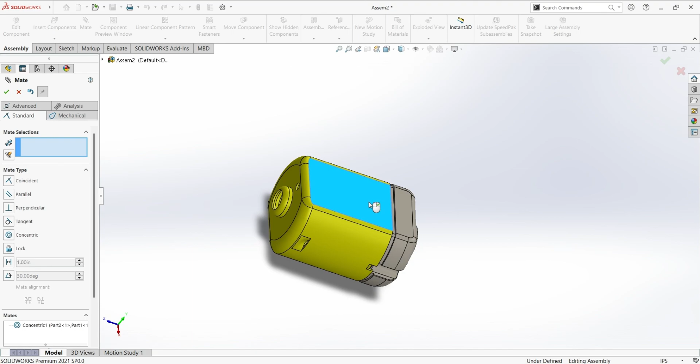So you can see now that the parts are fixed at its correct position. You can move it up and down, you can rotate it, but all you can do with this part right now is it will not run from its axis. Okay, so next what we're going to do is...

Going to make it fixed by not rotating. I'm going to select this part and this part, mate with this, and we're going to make it coincident. Okay, so now we're going to make this with this. Just like this, it will not run from its rotation anymore.

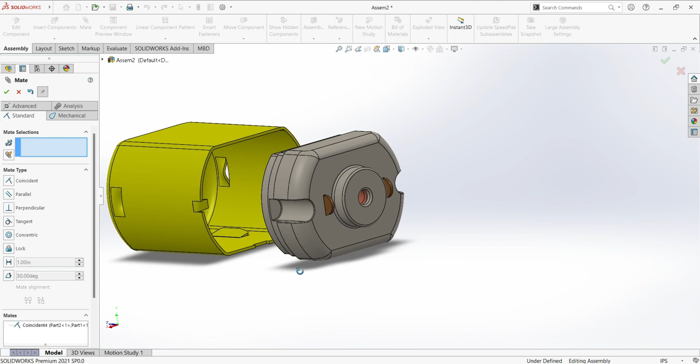It will not rotate, it will just go front and back. Next is that we can have a look, and then we're going to make this again. Like this is how it should look once it is mated.

Okay, so before we fix this part, we're going to have a sectional view from here. Yep, so from here you have a full view of the insides of the DC motor. You can see how it looks from the inside.

And what we're going to do now is insert our next part, which is the magnets here. Okay, now you can't actually see the magnet because it is in sectional view, but once I've unclicked it here, you can have a look. This is sectional view, and this is how it's going to look.

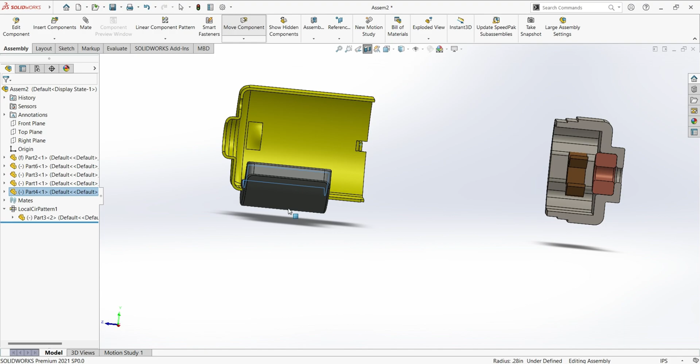It will still move up and down. It can rotate and can move like this. So what we want to do is we want the magnet to stay fixed with this part over here that we've made, and also this part. These two are functioning now as a holder for this particular magnet. Okay, so how we're going to do it is like this.

To fix the magnet in place like this, choosing one side of this, going to mate it with the part that we lofted, and we're going to tick it. So now this thing will not move away from there. Can rotate, yes, but will not move.

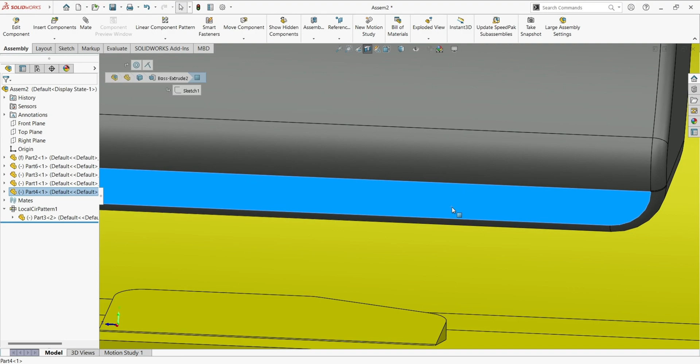To make it unable to rotate, what we're going to do is select this part, this side, and fix it with this edge. Okay, now we've done that. It's symmetrical, it's coincidental, and we're going to tick it, and there we go.

The magnet now is fixed at its place and it will not run. So that's how we do it.

Next, for a proper look, we're going to hide this component. So that's how it's going to look. Next we're going to cut the cross section, and then show components.

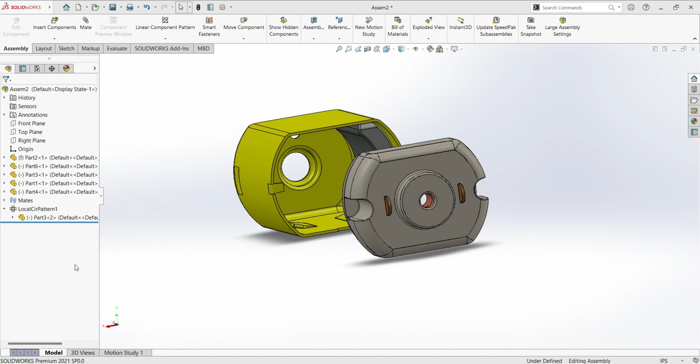We will bring in our next part, which is our spacer. We're going to make this part, this tower face over here, coincidental, and that's all. Now you can see it's going to move on top of the surface of this inner housing, right?

So what we're going to do next is mate this spacer a second time by choosing the other edge of this. Before that, using the top plane, we will have better visibility over the part. So what we're going to do is zoom in.

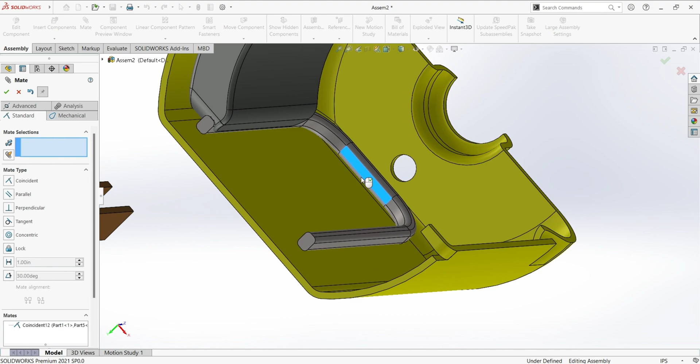We're going to mate this with this face over here, and then we will tick this. Now what the spacer can do is, it is fixed inside the inner housing, but it can still move from left to right like this, right?

So now we have this in place. We need another part of this magnet for us to fix this spacer at its place. What we're going to do now is go to the right plane, click it, and then go for mirror components. To mirror components, I'm going to click this magnet over here. Once you've done that, now we have two magnets.

After that we're going to go for mate, advanced mate, and width, and we're going to select this and this face of our magnet as our width selections, then choose this and this face, and you see it's automatically aligned. So that's all. The spacer is now fixed at its place and it will not move, as you can see.

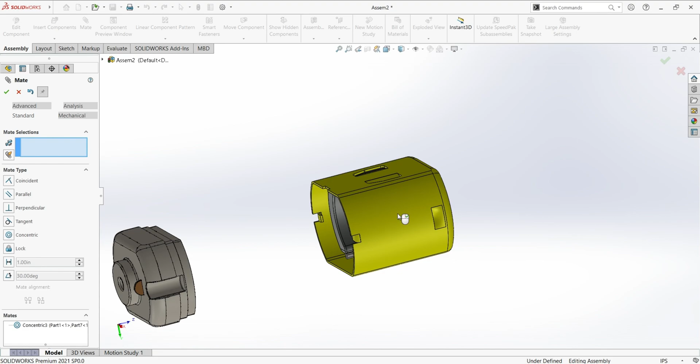Okay, so now once we have done this mate, we can now move our bushing, our second bushing. So what we have to do next is go to the right plane, and then we will do the sectional view.

Once doing that, what we will do is we can see where this bush is going more clearly. To mate this part over here with this edge, and there we go, we will have this part mated perfectly. It will only rotate here.

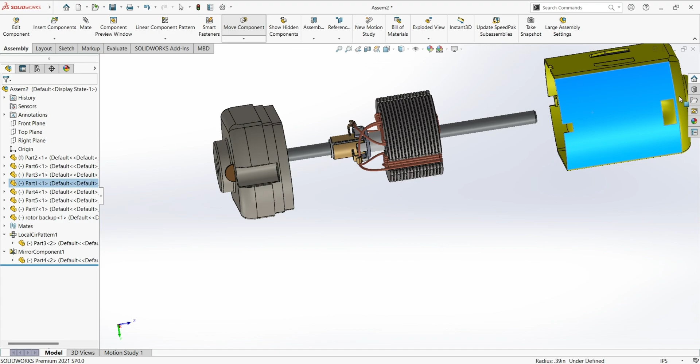Going to insert our final part, the rotor. So to look at the rotor, there, have it here. Okay guys, so this is the final piece that we will be inserting.

What we're going to do is we're going to mate the shaft with this face over here. Once you've done that, you can see it. This concentric, and then what we're going to do is that can now move freely front and back, right?

And then we're going to sectional view. Okay, so there, have a look on this. And then we're going to select this face and mate it with here, the bushing.

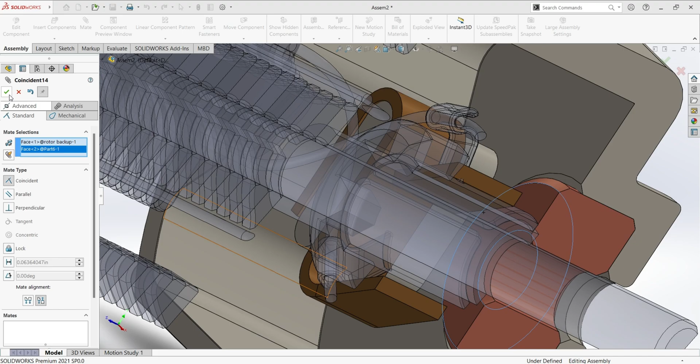So once this is done, the rotor can no longer move freely, it can only rotate. Go for mate, and we're going to choose width, and then we're going to choose here.

Going to go with, choose here, no, we're going to choose this face and this face, to here, and also here.

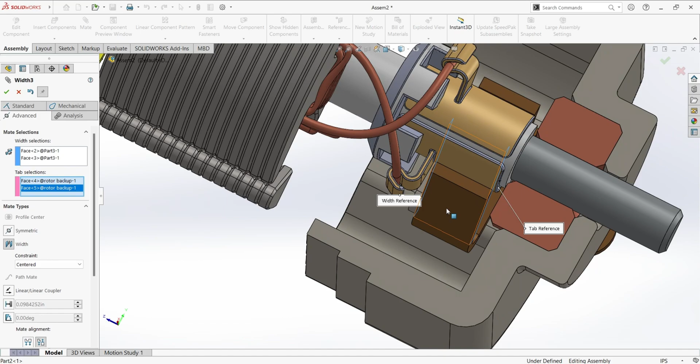So you can see now that even the coil holders are now at place. Coil holders and also the base flange part, they are now all fixed together, making it one whole DC motor. So this is how it's going to look.

So once this is done, we are going to make one small adjustment, a fillet, and then we're going to choose 0.05 mm, and then choose this face over here.

Alright, so once you've done that, the last part we will be doing here is that we're going to change from sectional view to normal view. Okay, so now that we've removed from our sectional view, this is the last mate we will be doing, which is we're going to mate the case to the cover. So now we can see that it's still moving.

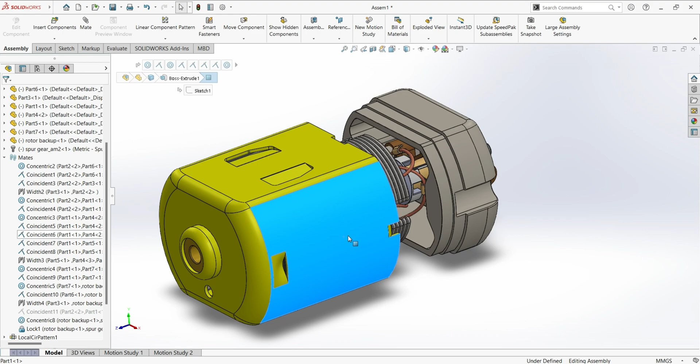So what we're going to do is mate here this face, so we're going to select this face, mate this with here, like that. This is how it's going to look inside the DC motor.